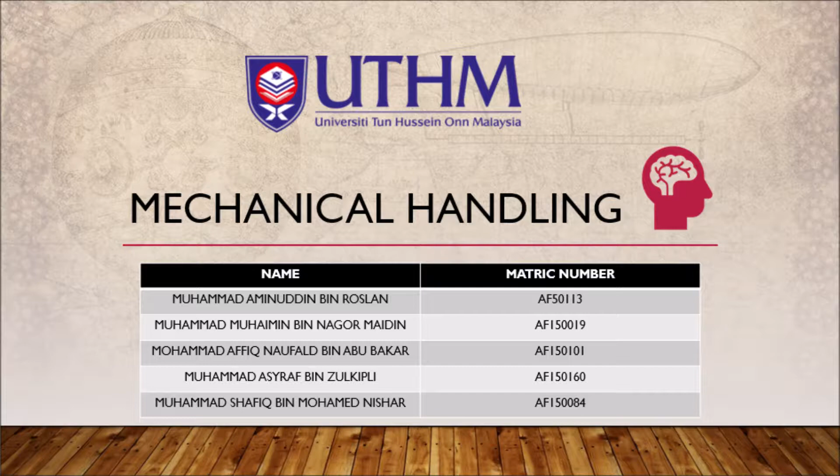We are from Group 9 to present about mechanical handling. Before we start or explain to you about mechanical handling, I will introduce to you our group members: Muhammad Shafiq as the first presenter, second Aminuddin, Muhaimin, Muhammad Asyraf, and lastly this is me, Mohammad Affiq Naufald, as the last presenter. So let's proceed to the introduction of mechanical handling.

Today, I want to explain about a project which is about mechanical handling. So, I'll be taking the introduction. Mechanical handling plays a very integral part in the construction industry. That means mechanical handling plays a very important role. Without proper mechanical handling, it can actually cause more harm than good to workers, as handling this kind of heavy machinery requires certain skills that workers need to have.

Every year, many workers are victims of work-related accidents, some of them serious and some even fatal, or contract occupational diseases because they are exposed to numerous hazards posed by the machines they operate and their work environment. This is because this machinery is very heavy and very strong. This machinery can actually cause harm to people if not handled properly.

Main mechanical risks include cuts, lacerations, needle punctures, crushing and contact with machines, as well as falls from heights, slips, trips and falls on the same level, and also trench cave-ins. This is all due to improper handling of machinery at construction sites, which can cause some damage to our human body. Thank you.

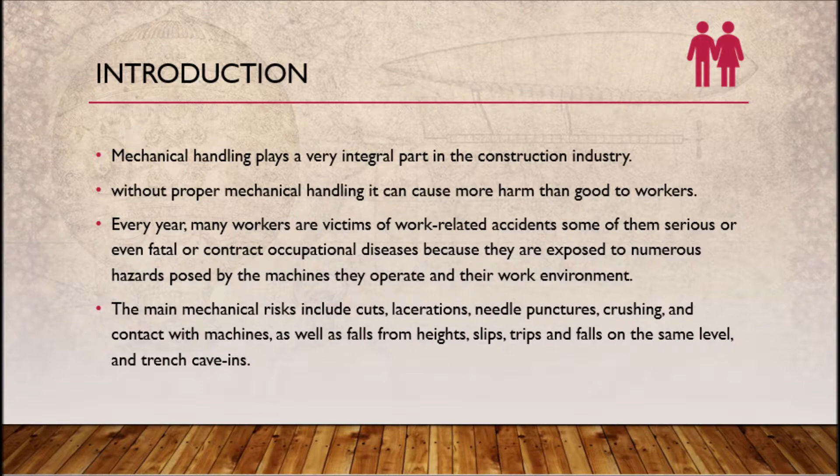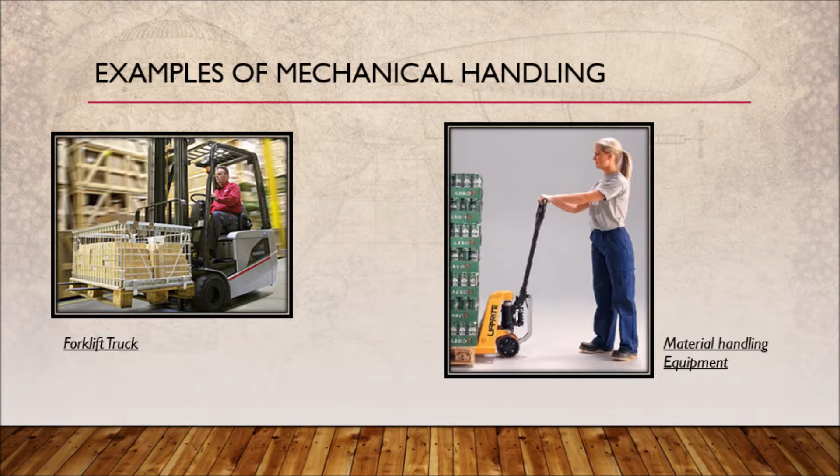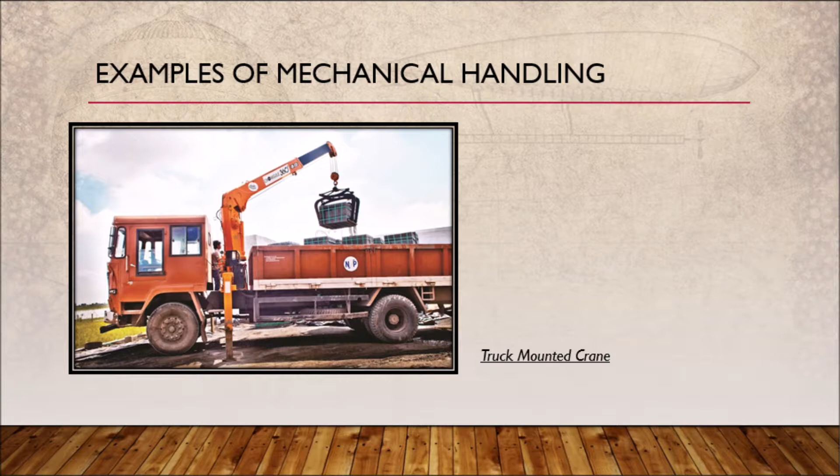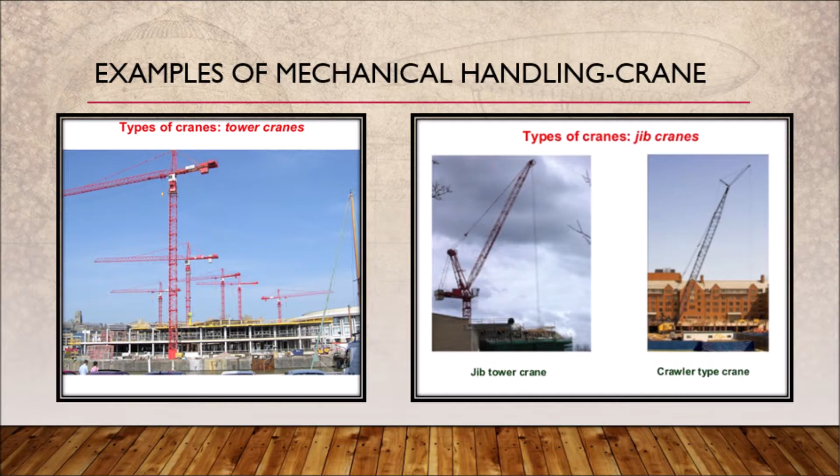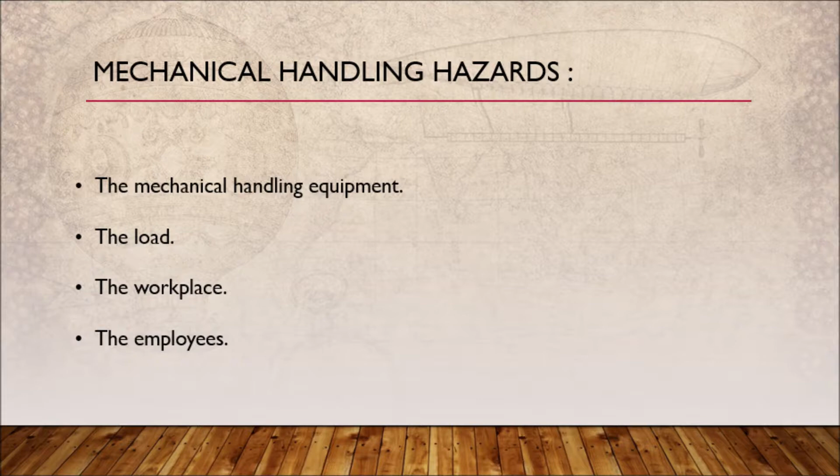Next I will continue to the mechanical handling hazards. There are four mechanical handling hazards. First, the mechanical handling equipment. Second, the load. Third, the workplace, and the last is the employees. What is the mechanical handling equipment? It must be capable of lifting and/or moving the load, and must be fault free, well maintained and inspected on a regular basis. For the hazards: collision between people and the equipment, personal injury from being trapped in moving parts of the equipment such as belt and screw conveyors.

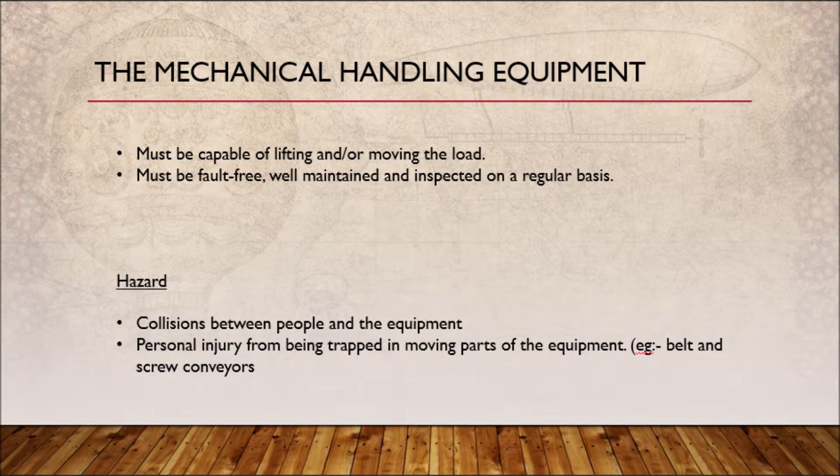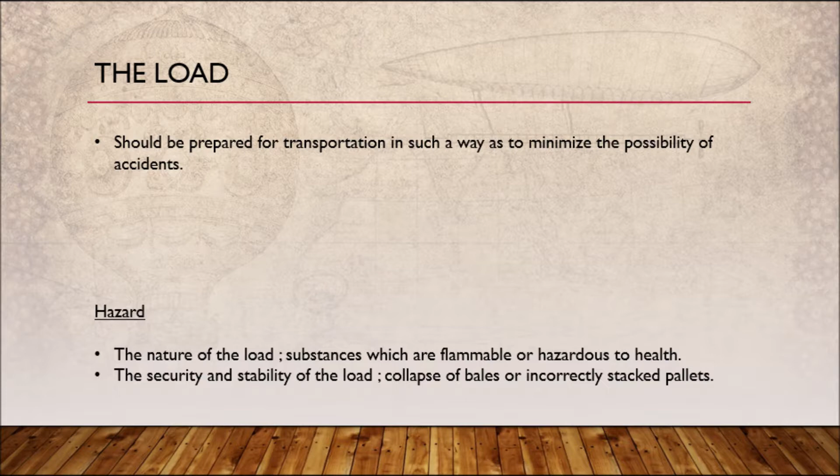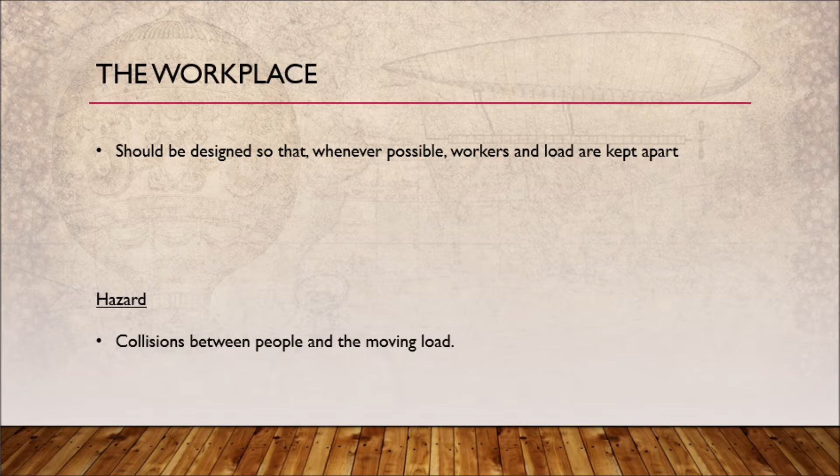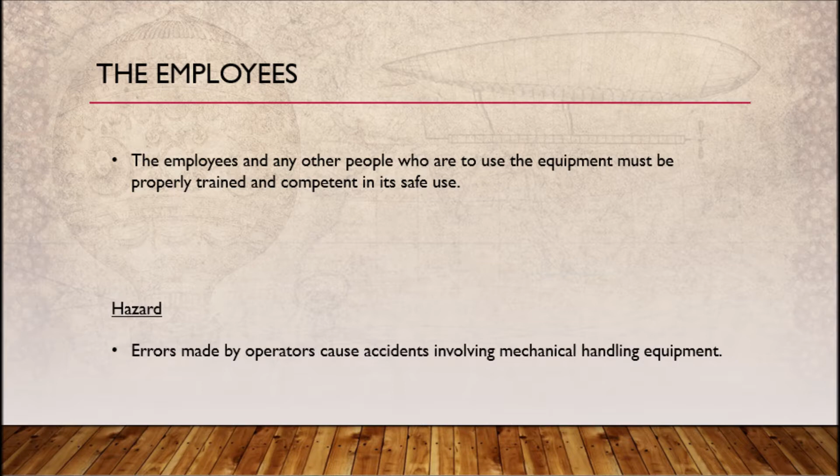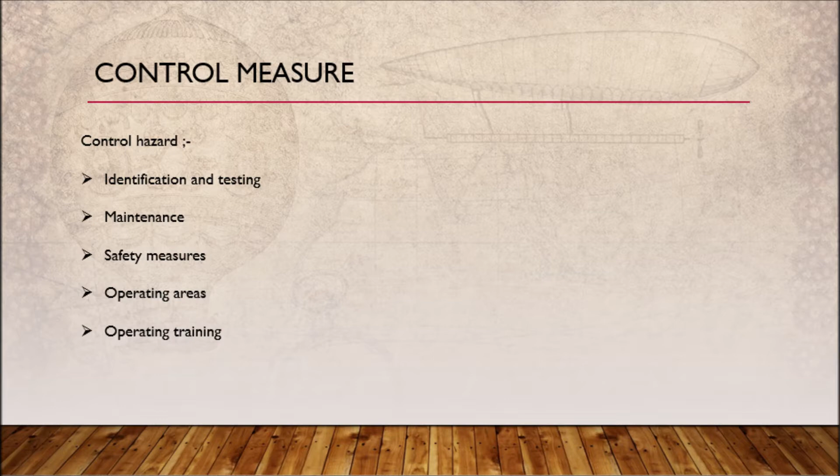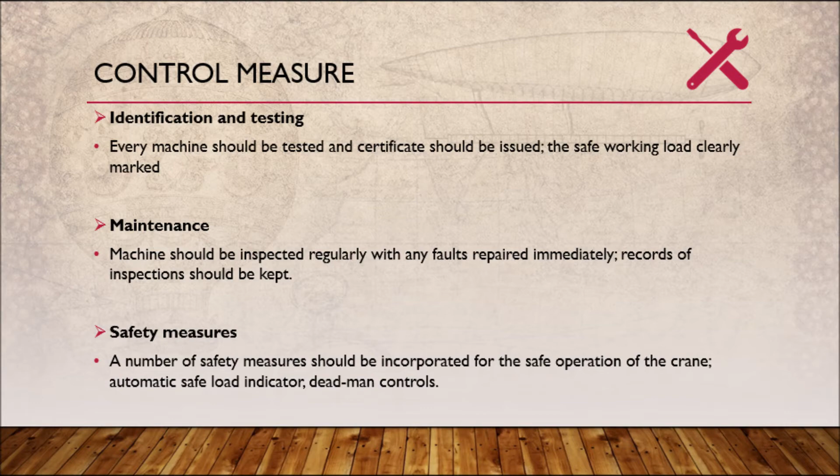First, identification and testing. Every machine should be tested and a certificate should be issued. The safe working load clearly marked. Second, maintenance. Machines should be inspected regularly with any fault repaired immediately. Records of inspection should be kept. Safety measures. A number of safety measures should be incorporated for the safe operation of the crane: automatic safe load indicator, deadman control, and other machines.

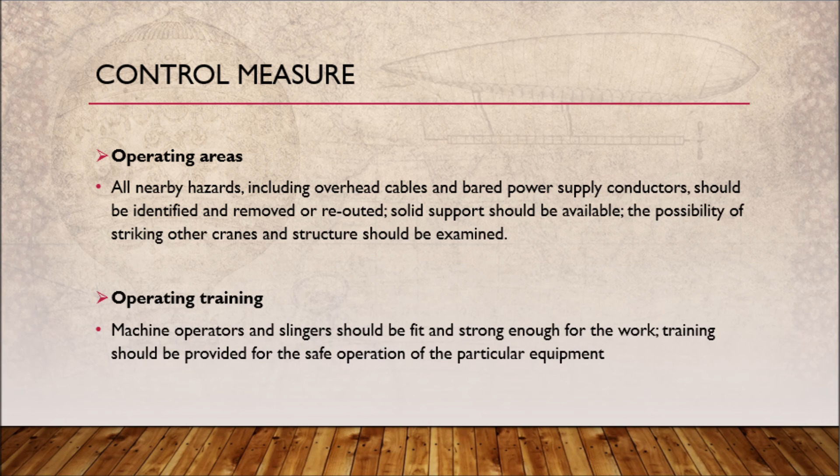So that's all for our presentation. Now, let's proceed to the question and answer session. So do you have any questions or is there anything you do not understand? You can ask now.